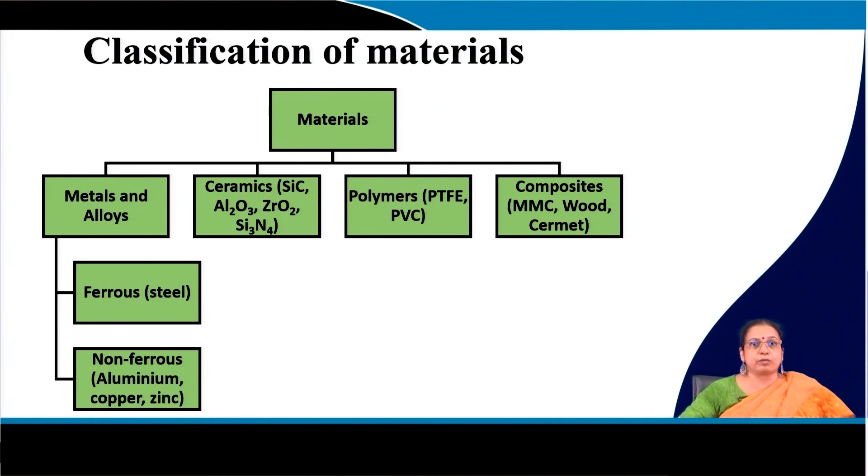Now, quickly go to the metallic materials. If you just go to the periodic table, you will find that 90% of the elements are metals in nature, and these metals are not used in nascent or pure form. They are alloyed with other metals. If you quickly go through the characteristics of the metallic materials, they come from the kind of bond that exists in these metallic materials, the way they are bonded.

In metallic materials the nature of bond is metallic, where metal ions are immersed in the sea of electrons, and this bonding characteristic gives important properties like high reflectivity, conductivity, toughness and hardness. Because of this bonding, metals have very unique properties which are not there in ceramic or polymeric materials. Metals are mostly crystalline, and examples include gold, silver, copper, zinc, tin, and they may be body centered cubic, face centered cubic, hexagonal close packed, and so on.

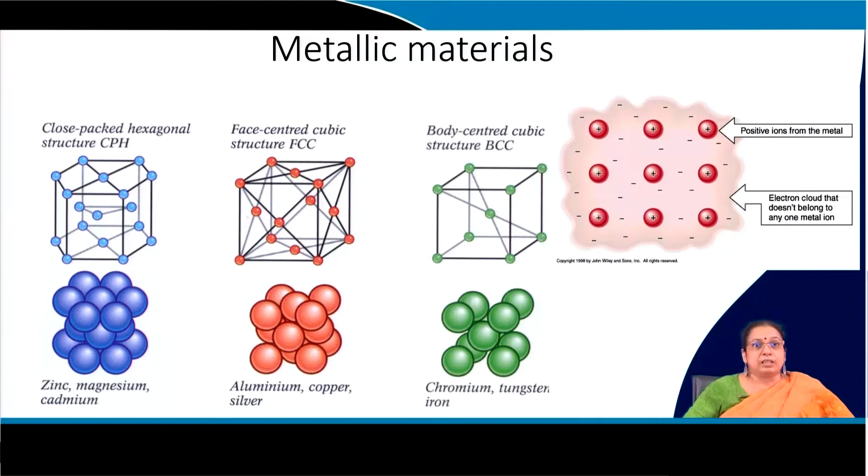Now, if you quickly go to the applications, you will find a large level of applications in automotive, aerospace, construction and transportation sectors, where environment plays a very important role in determining the service life of the component. So, it is important to know how it interacts with the environment, what the outcome of the environment-metal or environment-alloy interactions would be, and subsequently the service life of the component. This is the case for bridges: a large bridge made of metallic materials is usually coated by corrosion resistant material so that it can survive in the environment.

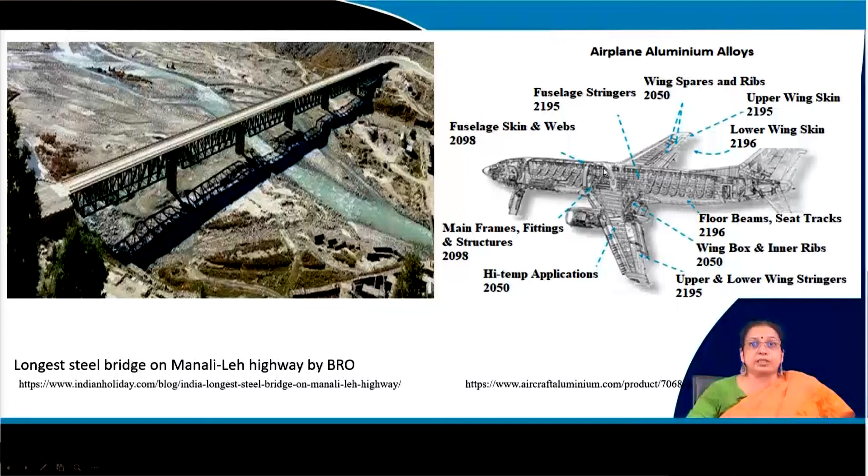Similarly, in the aerospace sector, a lot of aircraft components are made of metals and alloys, particularly aluminum and titanium based materials. Another important application of metals and alloys is as bioimplants. Dental implants are made of titanium and its alloys, then cranial plates, pacemakers, heart valve cases, bone plates, knee joints and hip joints are all made of metals and alloys, where the body environment and its interaction with the metal plays a very important role in determining the service life of the implant.

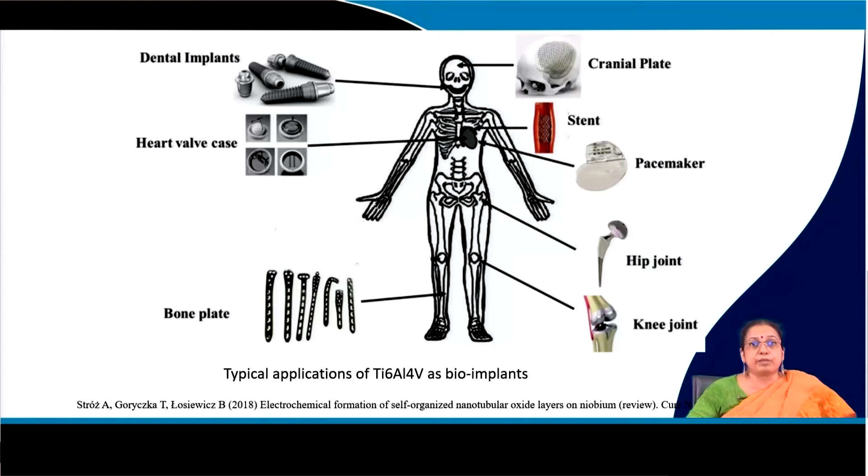This is a very important application where, if the degradation rate of these materials is very high, you have to go for resurgery, which is a really painful process. So, you have to select the material in such a fashion that it can survive in the human body environment for a longer duration.

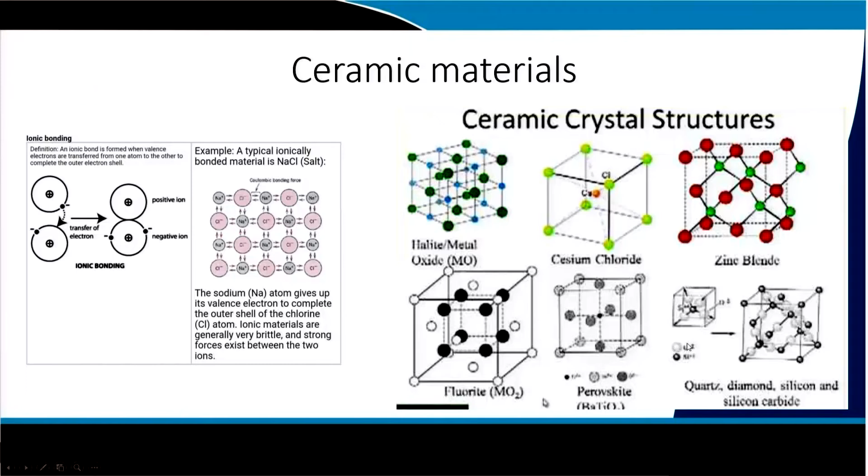Now, the second type of materials is ceramic materials. Ceramic materials are non-metallic materials which are combinations of metals and non-metals, and the bonding in ceramic materials is either covalent or ionic in nature. Examples include sodium chloride, different types of oxides, cesium chloride, zinc sulphide and fluorides. There are many ceramic materials, and they may be categorized into glass based ceramics or polycrystalline solid ceramics.

So, these are crystalline, but these are non-crystalline, and you can also have a number of composites like glass-based ceramic crystalline fillers or crystalline-based glass fillers. So, these composites have superior properties as compared to their base material like glass or crystalline solids, and they also have a lot of applications like bulletproof jackets made of these ceramic materials,

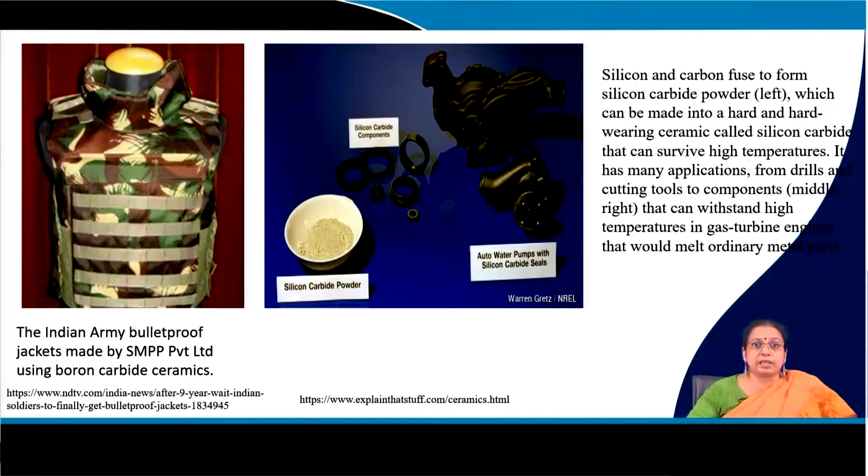and similarly silicon carbide powders, where silicon and carbon are fused to form silicon carbide powders by a sintering process, which is used for high temperature applications, such as cutting tools or drills. So, ceramic materials have durability at very high temperature, and they are very hard in nature, which is not there for metallic materials. Strength-wise, ceramic materials are harder than metallic materials, but they are not really ductile; they are very brittle in nature.

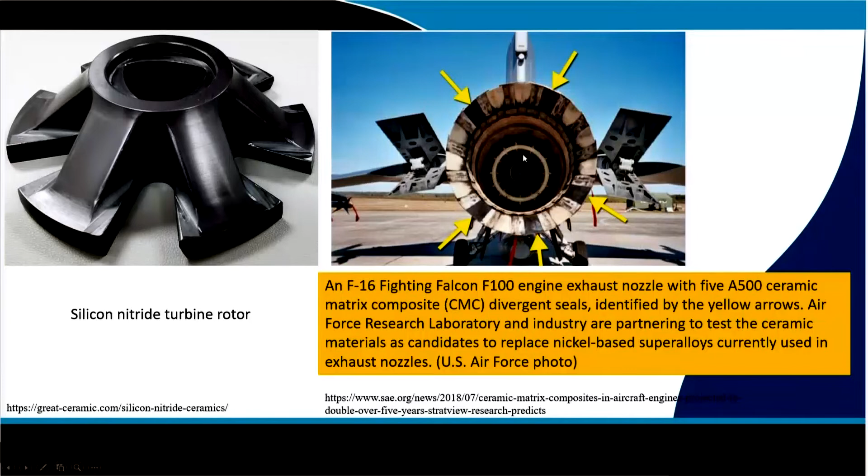This is a silicon nitride turbine rotor made of ceramic materials, then the F-16 Fighting Falcon F-100 engine exhaust nozzles. These are made of ceramic materials because of their durability at very high temperature. They are highly durable in nature, so they are usually made of ceramic materials.

Similarly, glass ceramics have a lot of applications in construction sectors because of high strength, appealing aesthetics, low cost, low thermal conductivity and low coefficient of thermal expansion, like kitchenware, then electronic applications, dental replacement, orthodontic applications, high thermal stability, and radar wave transference because of their low coefficient of thermal expansion. So, because of these important properties, ceramic materials also have a lot of applications in structural sectors.

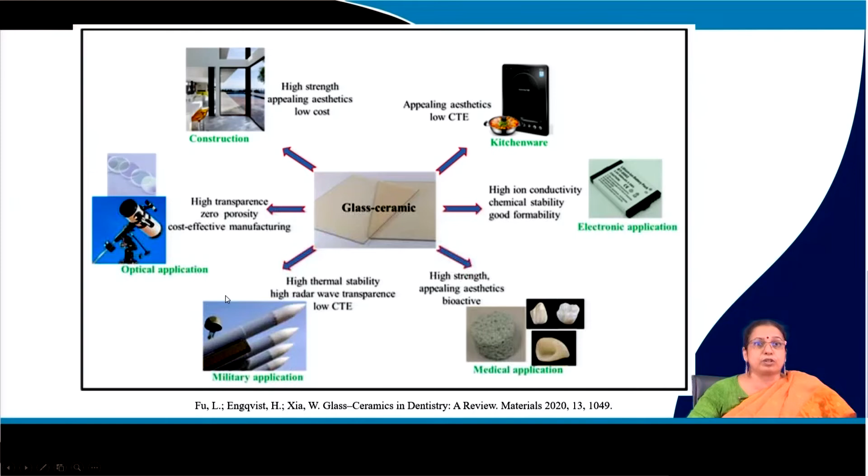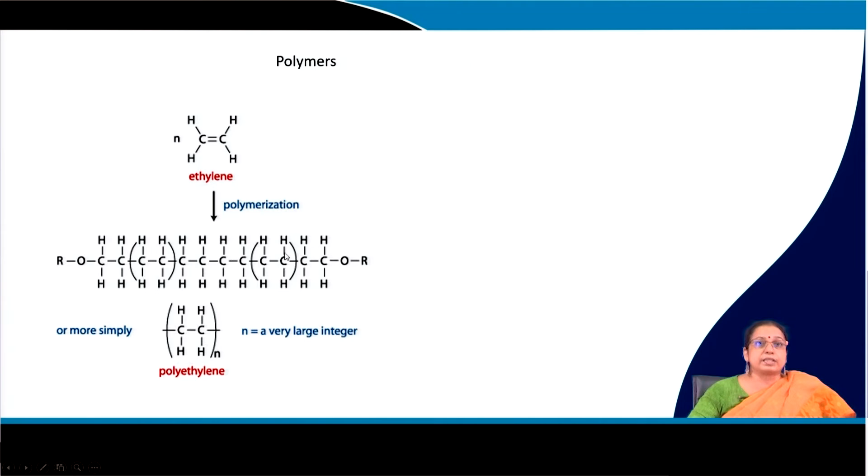And finally, polymeric materials are molecules of high molecular weight. They are made of large numbers of monomers, held together by primary bonds like covalent bonds, or secondary bonds like hydrogen bonds or van der Waals bonds, like polyethylene.

So, these polymeric materials also have a lot of applications because of their light weight and very low density, like this example of polymeric materials in a car body. To reduce the weight of the car body, many parts are made of polymeric materials. Polymeric materials are very stable at room temperature and a little higher temperature, but they are not stable at very high temperature, and their density is very low.

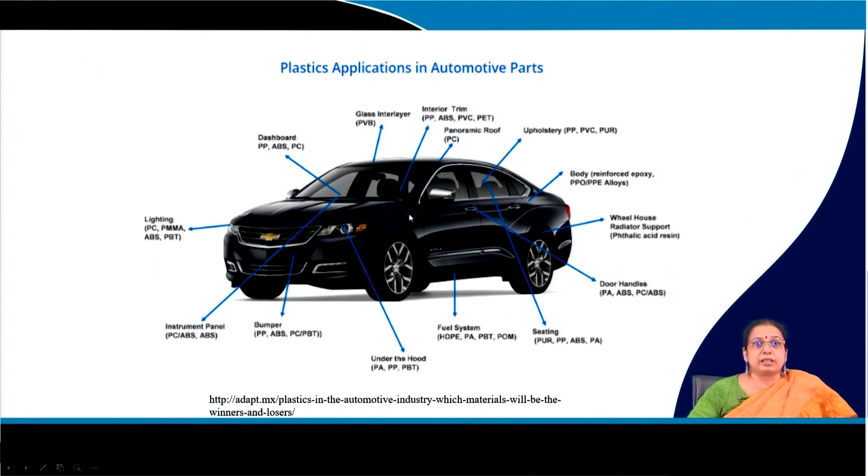So, composites are another kind of material, which is nothing but a combination of base materials and other fillers, like metal-ceramic combinations or metal-polymer blending. These are mixtures made in order to improve the properties of the base metal. Like in aluminum as a metal, if you go on adding silicon carbide ceramics, you can increase the strength to a larger extent. Similarly, wear resistance is also increased.

On the other hand, if you go on adding very fine glass fibers in rubber, you will find that the strength of rubber increases. Similarly, you can also add them in polymer, and their strength increases. So, like that you can have combinations of metal and ceramics, metal and polymers, or polymer and ceramics, and finally get the required properties of the overall materials which you are going to design or develop. So, it is a very important category of materials, where a lot of focus is going on.

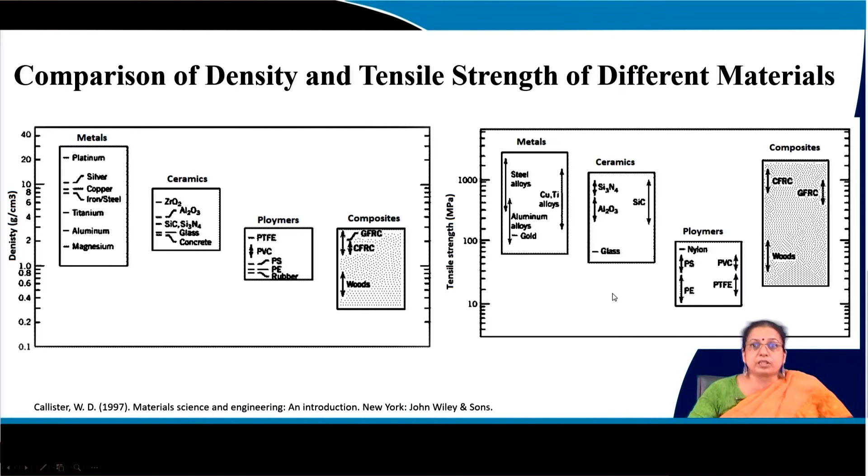Polymeric materials have very low tensile strength, and composites can have near equivalent or higher tensile strength than that of metals, ceramics or polymers, based on the kind of constituent elements used to develop the composite materials. Similarly, if you quickly go through the fracture toughness, you will find that metals and alloys basically have the highest fracture toughness because of their nature of bonding, ceramics have very low fracture toughness, then polymers, and composite materials are in between.

If you see the electrical and thermal conductivity, metals and alloys have the highest electrical and thermal conductivity, and as a result, metals like copper are very much in use as heat exchangers. Similarly, copper and its alloys are also used as electrical wire. Ceramic materials have very low thermal conductivity, so they have applications where you do not need conductivity, like insulating material, particularly thermal insulating material; they are very much used as thermal barrier coatings.

Similarly, polymeric materials also do not have good electrical conductivity, but some high conductivity polymers are also coming up, which are used as coatings, and semiconductors are special categories of materials made of metalloids, which are made conductive by a special change in the environment, by application of a dopant, or by application of potential.

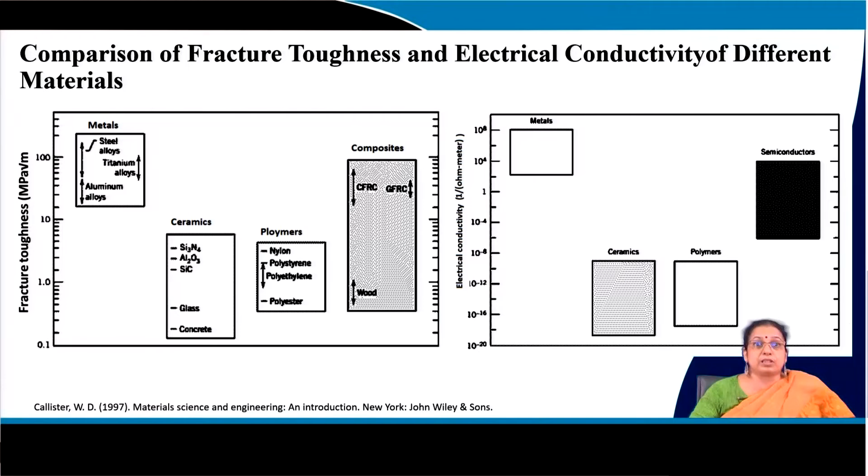Now, coming to the next term, that is environment. Environment is very important, as I mentioned, since the performance of any component or material is very much dependent on the environment, so metal-environment interaction is also very important. Environment comes from the word environner, which means surrounding. So, it is nothing but the air, water, land and the interrelationships that exist surrounding living organisms, matter or materials, or humans.

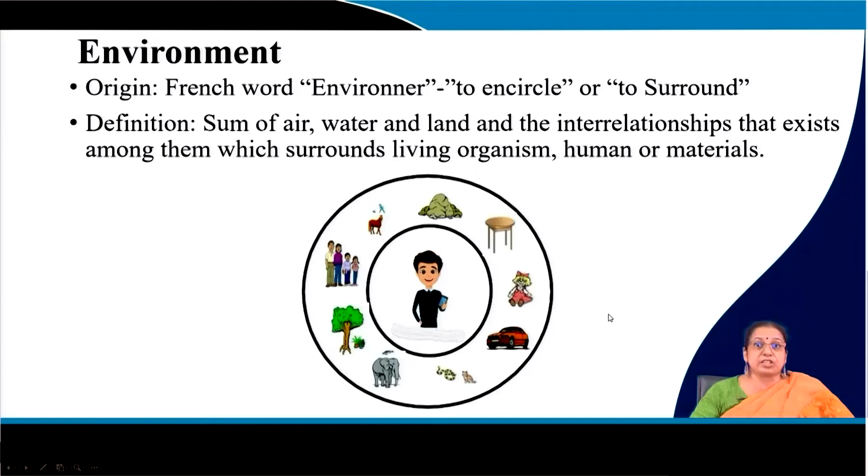So, naturally you have to know what kind of species are there in the environment and how they interact with each other, which ultimately determines your overall service life, or survival chance. If you quickly go through the components, there are 4 important components of the environment: atmosphere, which is the gaseous component; lithosphere, the solid component; hydrosphere, the liquid component; and biosphere, the zone where living organisms exist.

So, whenever you think of the environment, you have to specify all the things very carefully, so that you know the complete parameters of the environment.

Now, if you just quickly go through the role of environment on materials degradation, you will see that there are 3 important factors which basically dictate the degradation of the materials in the environment. First one is meteorological and climate factors. Second one is the species which are there in air, water and soil, that is in the lithosphere and atmosphere. It may be normal species like air, it may be some airborne viruses, or it may be some airborne chemicals.

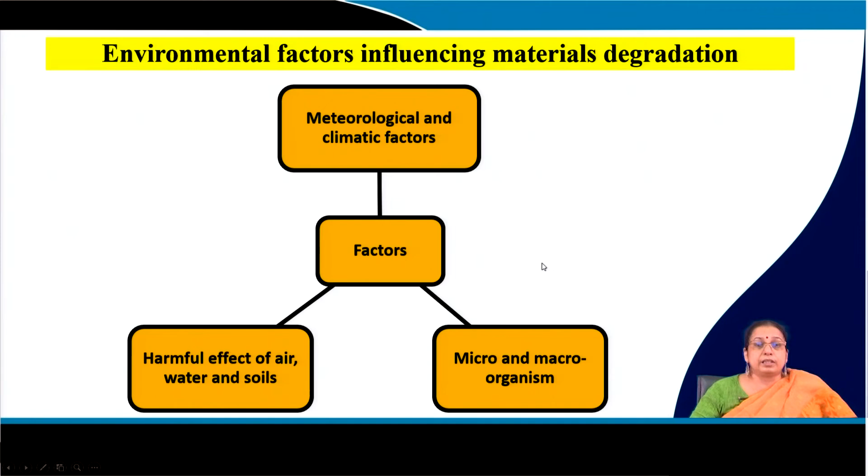So, whatever species are there in the environment, it determines the kind of degradation rate, or how they interact with the component, and finally the micro and macro organisms which are present in the environment. So, these are the 3 important factors which equally determine the degradation behavior of the materials in the environment.

So, if you quickly go through the meteorology and climate parameter, it is nothing but like solar irradiation. Because of solar irradiation, overall environmental temperature changes, humidity content changes. So, if it is highly sunny weather, you will find that the temperature is very high. Somewhere the ozone layer is very low, naturally you will find that temperature is also quite high, and it may be a little harmful.

Somewhere where weather is very cloudy, you will see that there may be some humidity, water containing species in the environment. If it is rainy season, a lot of water is there in the environment. So, humidity content changes with the temperature of the environment and also the water level in the environment. So, moisture content and temperature are very much determined by the solar irradiation and where you are, and these all things are very important. They combiningly determine the interaction behavior of the component with the environment.

For example, somewhere the weather is highly windy. So, if it is very windy, you will see that a lot of hard dust species are carried along with the air, and they can cause typical mechanical degradation of the material, which may be termed as erosion. So, this is another kind of degradation.

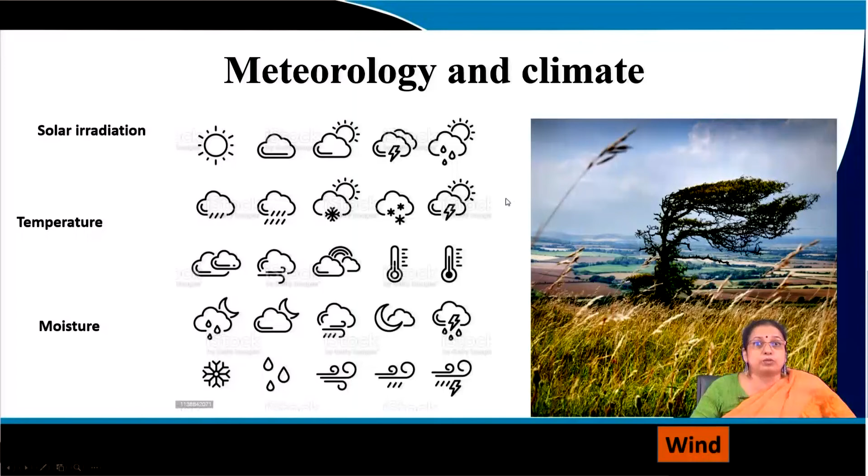So, you will find that in environment, if you see the climate, it is the temperature, the humidity content, and the rate of movement of the air, or you can say the speed of the wind. So, these all things play an important role to determine the meteorology and climate, and hence subsequently the degradation behavior of the material.

Similarly, if you see the airborne species, it may be typical CO2, maybe nitrogen, or maybe combinations of carbon dioxide, nitrogen dioxide, methane. So, many species may be there in that particular air, and sometimes if it is near to mining, there may be some metallic species or minerals in the soil, and those minerals may get absorbed by the tree, and also you find that minerals may be borne in the air.

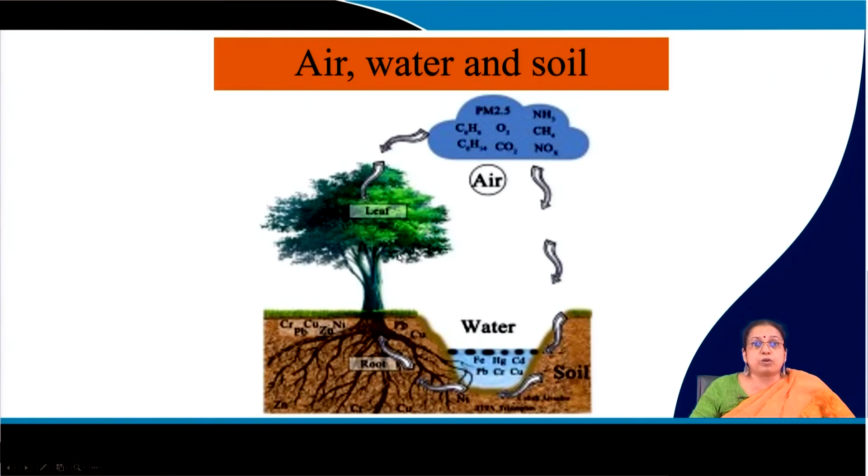So, depending on the zone where you are using the materials, the environmental condition changes very frequently, you can say. So, it varies from zone to zone. So, it is very important that you know where the component is used or where is the final application of the component.

So, if you just quickly go through the micro and macroorganisms, this is nothing but bacteria, fungi and protozoa. These biological species also can cause a lot of degradation which is even not known to us properly. There may be different types of prokaryotic or eukaryotic microorganisms like Coccus, Bacillus, Vibrio, Coccobacillus, Spirillum, then Spirochete. So, these are different types of microorganisms which are present in the environment.

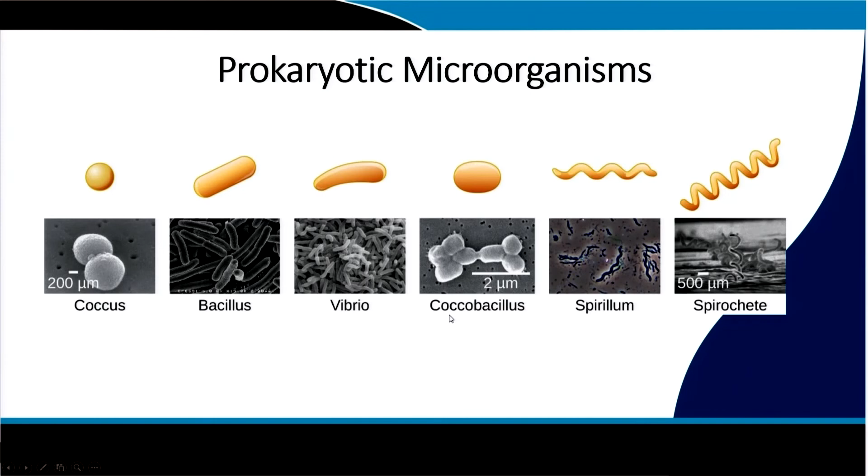Similarly, algae, protozoa, fungus, these are also different eukaryotic microorganisms which are present in the environment. So, these particular species can get deposited on the surface of the materials or component and can cover the surface and can accelerate the degradation, you can say.

For example, if the fungi is there on the food, naturally it poisons the food. And sometimes, if you just keep a component made of copper or maybe brass somewhere near to soil, you will find that there are a lot of fungi getting deposited on the surface, and if it is deposited for a longer time, not only the deposition of fungus, it can also accelerate the chemical degradation of the material,

because if water molecules are there in the environment, the water molecules can also go on transporting through the fungi layer near to the surface, and there is always differential aeration cell formation, as a result of which you will find that the corrosion process also proceeds in a faster fashion.

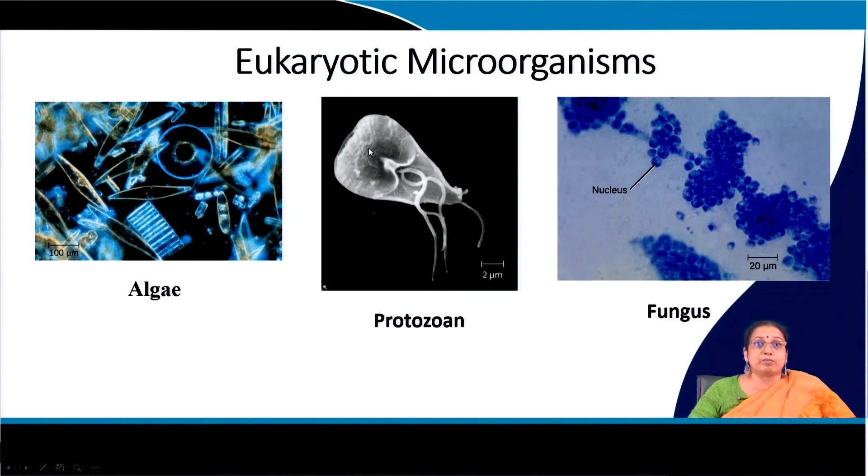Those things will be discussed at a later stage, but what I wanted to say is that these microorganisms are very detrimental to the human body, but they are also detrimental to materials. If they directly deposit on the surface of the metal, you can go on cleaning it and get the metal back, but whatever may be, it will deteriorate the physical properties, like the luster of the surface changes, and it can also accelerate the chemical degradation of the materials.

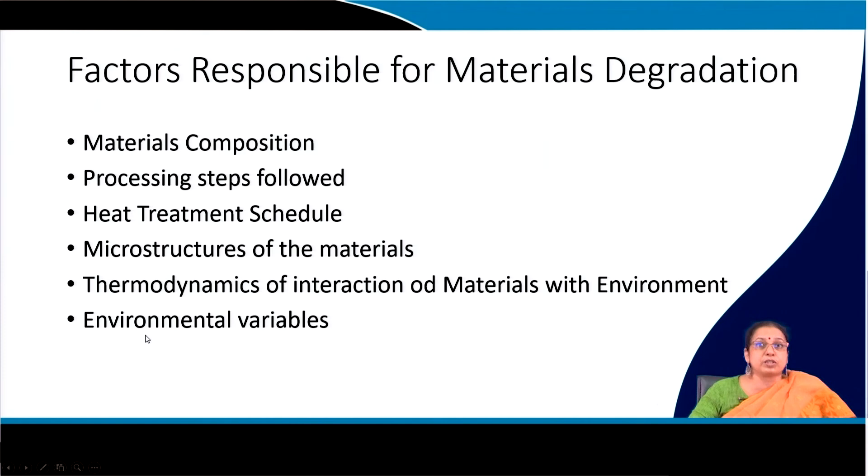So, finally, if you quickly go through the degradation of materials, there are many causes which can lead to degradation because of the presence of different species in the environment. The material factors which dictate the degradation behavior are the composition of the materials, the processing steps followed for development of the component, the heat treatment schedule, the microstructure of the component, the thermodynamics of the interaction of the materials with the environment, and naturally the different environmental variables.

So, in summary, in this particular talk the different classifications of materials are given, and particularly metals are discussed, but metallic materials are not used in the pure state; mostly they are used as alloys. Alloys are nothing but a solid solution of another metal in the parent metal, like copper is the pure metal and brass is the alloy, where zinc is added to copper in order to increase its strength.

Similarly, gold is never used alone to fabricate jewelry. Some amount of copper is added so that its strength is increased. So, metals in the pure state are not usually used, and for different purposes, different types of alloys are used. For example, steel is an alloy of iron and carbon. When it is plain carbon steel, only carbon is there.

Pure iron is of no use because it has very poor strength, but when you add carbon, you increase the strength. So, it is called an alloy. Plain carbon steel has good strength, but not really very high strength. If you want to increase strength further, there is ultra high strength steel where microalloying elements are added. Similarly, to increase corrosion resistance, you add chromium to steel, which is called stainless steel. So, those are alloys.

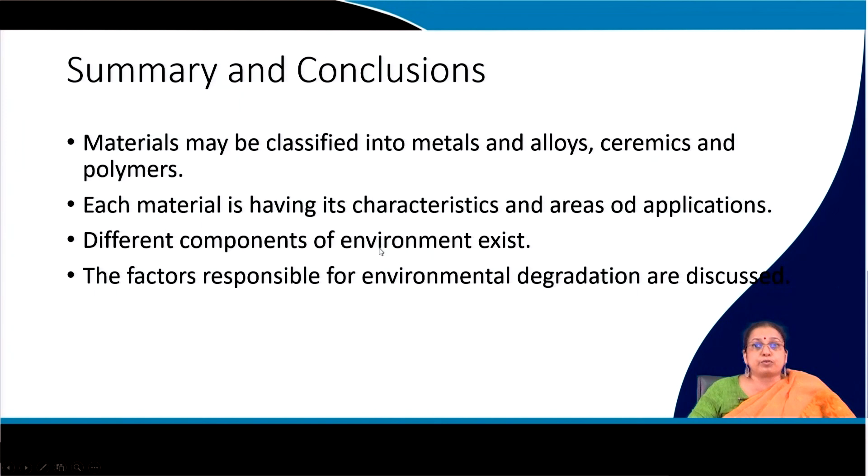Each material has its characteristics and areas of application, and naturally different components of the environment exist, and the factors responsible for different environmental degradations are also discussed in this particular talk.